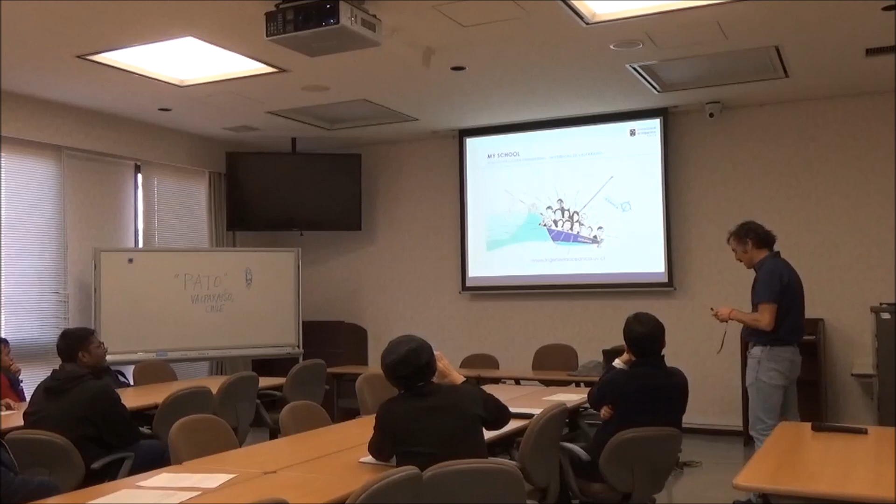I'm from the School of Ocean Engineering at Universidad de Valparaíso. It's a very strange name, but that's the name of the city. I'm basically a civil engineer, but I did some environmental engineering. My major in the PhD was environmental fluid mechanics, and I work with this professor, as Professor Lee told you just before. So I'm going to talk about this from that perspective, like civil engineering and hydraulics and all that stuff.

Why am I here? Basically because I'm very interested in what happens in Japan. So I took a leave of absence from the university from December till the beginning of March, and I came to the country of Yoshimi Goda and all these people. We had to deal with coastal engineering problems all the time, and Yoshimi Goda is kind of like, wow, yeah. So why not come to Japan and visit?

Also, I'm really interested in what Professor Lee does here in terms of tsunami interaction. That was one of the research topics I covered lately in the last couple of years. Now I'm shifting towards other things - in coastal engineering you do lots of things, it's not so specific. I'm working with Professor Kenji Satake at the University of Tokyo trying to learn something about inversion of earthquake sources with tsunami data.

It's just an excuse to come here and learn something about how research happens here in Japan.

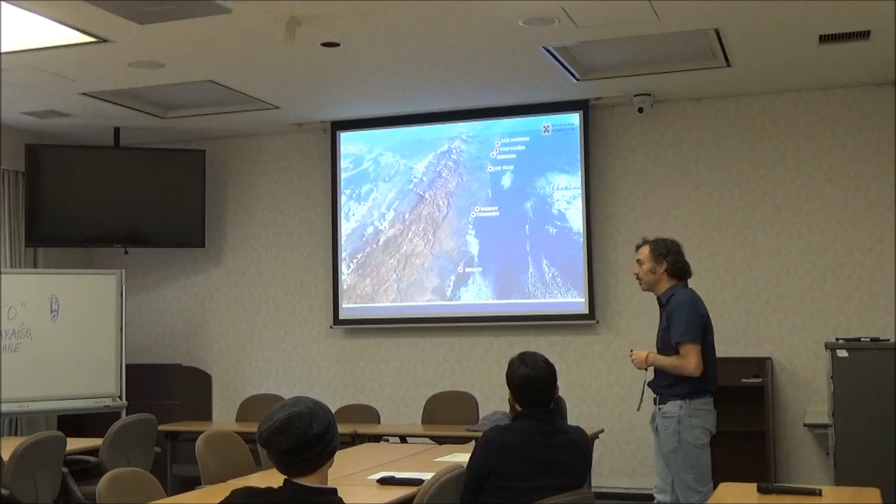And this is the kind of activities we have. We are a mining country - this is the export of iron. We also have salmon, almost all of our salmon is exported to Japan. This is in the south.

This is where the Andes sinks into the ocean. That looks like Mount Fuji. Yeah, we have lots of lower mountain Fujis there. And this is not a big one, they're much larger.

So this is my hometown, one of the second largest ports in Chile. My office is somewhere here, behind this. So imagine that you're studying tsunamis and earthquakes and all that stuff, and you're literally on top of the coast. So it's very interesting.

So if we talk about coastal engineering, just to give a general point of view, these are some of the variables that we need to take into account when we make a design - for example, a port, a coast, like a coastal road or whatever, or an artificial beach. You need to know some things, variables about the ocean, like sea level rise or not, waves, tsunamis, and all that stuff.

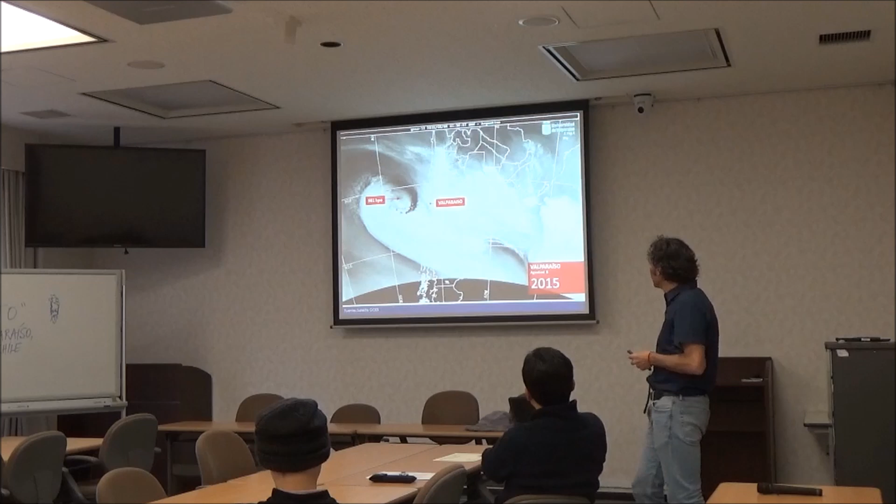I'm going to talk about a big storm. For us, it's not big if you compare it to storm surges in, let's say, the Gulf of Mexico. But I'm going to talk about one particular storm that we've been studying because it caused lots of damage in central Chile.

Very simple thing, but this becomes a little bit more complicated if we start digging into engineering. So waves in the context of storms can be separated into time and space, and there are different scales.

Swell generation and sea generation offshore can take days up to weeks in order to generate. But then you have coastal waters, the waves approaching the coast, which tend to be affected by refraction, shoaling, and all that stuff. Then you have nearshore waves where diffraction and reflection become important.

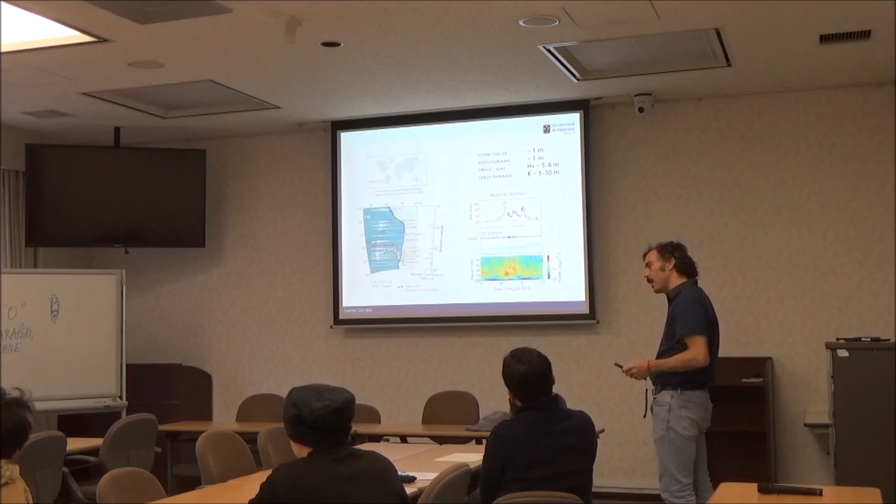So, for example, in Callao, which is something like 3,000 kilometers away from the source, this kind of perturbation was detected. So even though it's a locally generated phenomenon, it generates waves, tsunamis, and storm surges that radiate from the source and affect other places.

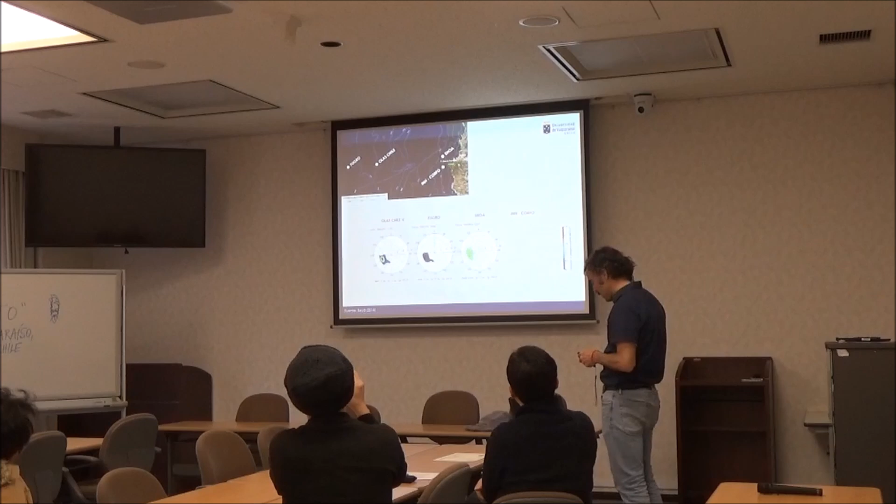Going a little bit more local, this is Valparaiso, the place where I live. What we can do is get information from wave hindcasts, forecasts, and also from buoys, in order to take that information as close as we can to analyze this particular case. Then we can use different grids to bring this information into more coastal areas.

And we can make analysis, for example, within the bay. These are many places within the bay - my office is here. This is basically the wave height, the period, and the tide level at different times. So we can estimate the overtopping, for example, in places like this.

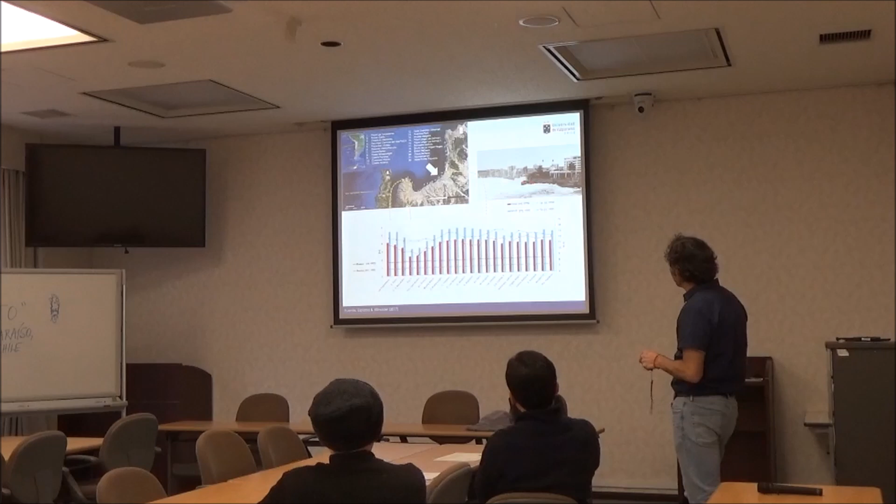So then you can go a little bit more in detail, and this is the analysis of this coastal defense. This is a very famous coastal defense because whenever there's a storm, journalists go there and start filming what happens because the waves go over and it's very dangerous.

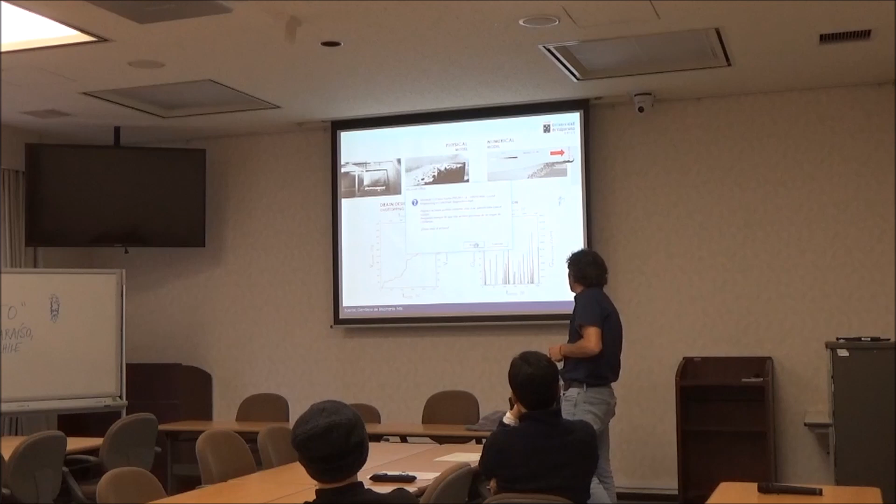And so this is a physical model that we carried out - the Chilean hydraulic lab carried it out - and we did the corresponding analysis with some sort of OpenFOAM type of model. So, for example, from this type of information, let me show you a video first. It will take some time.

So here's the submarine beach, and then you have the structure here. What we did here was build an artificial pond to capture all the water and estimate the volume, because with that volume you can design the drains of the coastal road to avoid flooding.

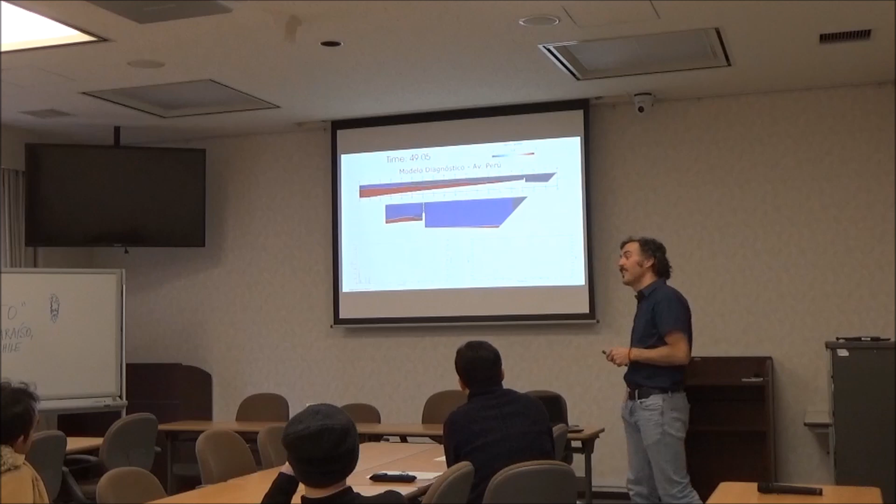And you can calculate, for example, instantaneous flooding or the accumulated volume over time. So in this particular case, we are calculating the flow crossing this area, and with that flow we can also calculate the velocities and see how safe it is, for example, for a person to be here, depending on the water depth and the speed.

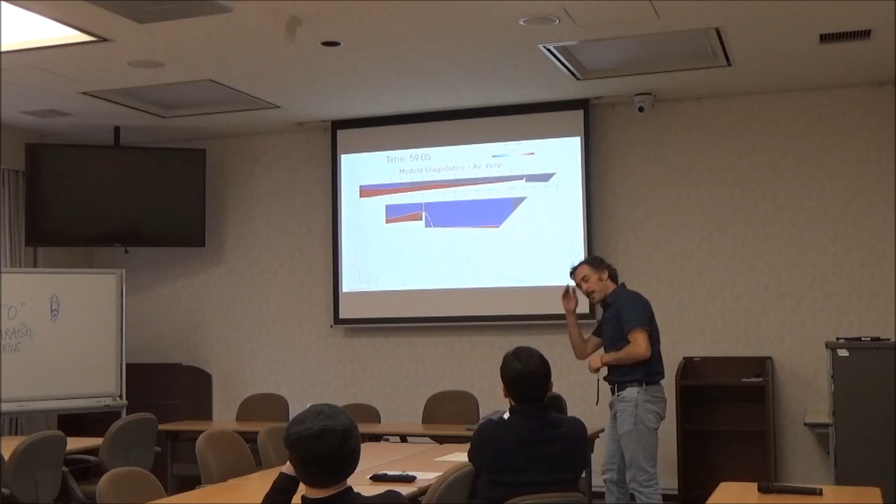Did you use OpenFOAM? It's OLAFOAM - an adaptation of OpenFOAM with some boundary conditions of waves, generated by Pablo Higuera from IH Cantabria, who's now working with Philip Liu in Singapore and the US. So they adapted IH foam or something? Yeah, they adapted OpenFOAM, and now it's called Ola, which in Spanish means wave. Ola foam, yeah.

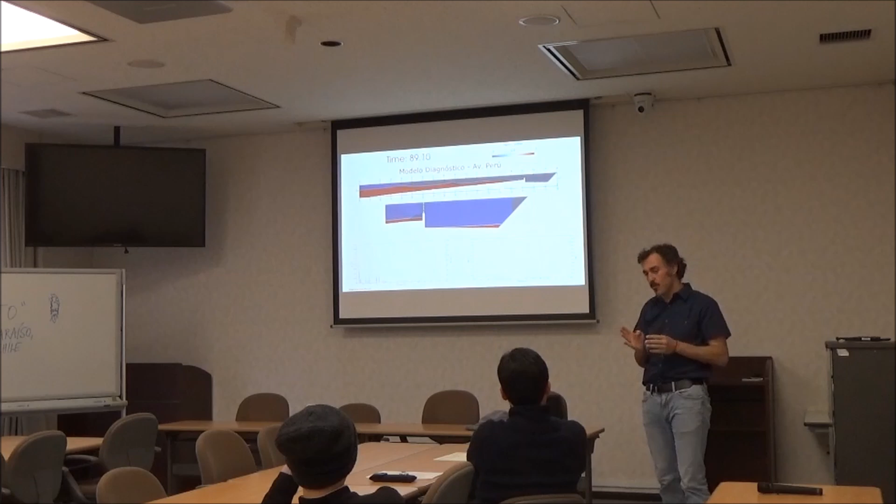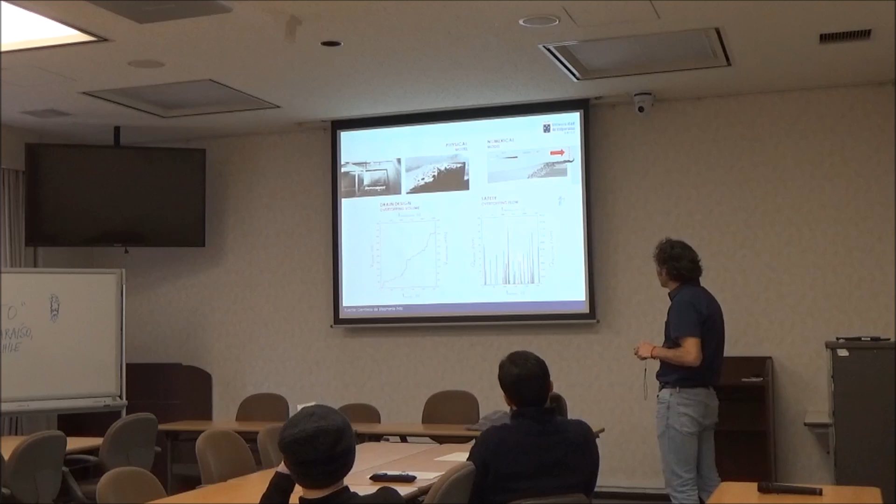Okay, so as I said, you can calculate the instantaneous flows at different times, and then the accumulated volume to calculate the drain design. And this one is for safety.

For example, this is something very preliminary that I haven't been able to review because this is an undergrad doing a very simple calculation. But for example, you can calculate with a very simple body force diagram what's the combination between water depth and speed that would make someone fall.

Yeah, very simple. I brought this one because I know Professor Taro Arikawa has done something with tsunamis here, but I haven't been able to find any paper in the literature actually calculating the flow and the body forces attacking a person or a car - kind of an empirical approach to understand what flow speed would move someone.

There are some studies, or even physical modeling studies going on at Kyoto University. Oh yeah, okay, so I have to go there. Yeah, because I know Professor Arikawa has done something, but I haven't found anything published.

Arikawa is in Chuo University. He was at PARI. Yes. But well, so now you give me an idea.

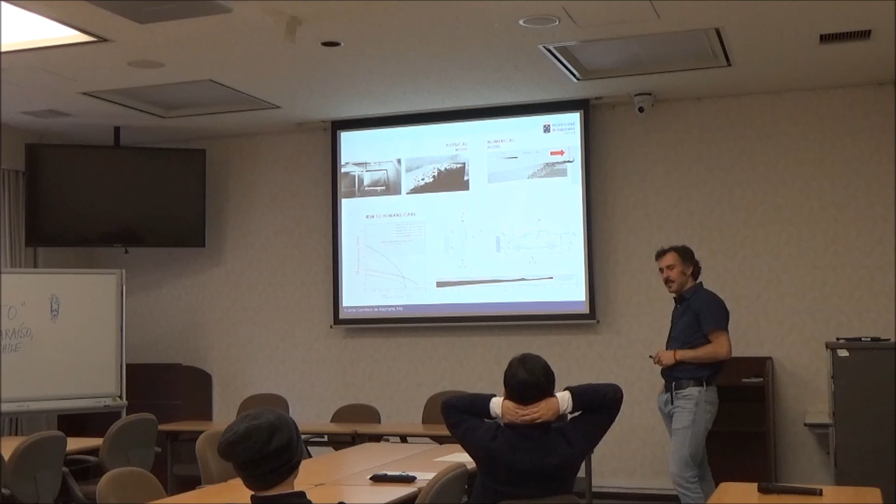Also, some hydraulic engineers in Kyoto University worked on this kind of body forces due to the tsunami, and even heavy rainfalls, so flooding situations. Yeah, very good.

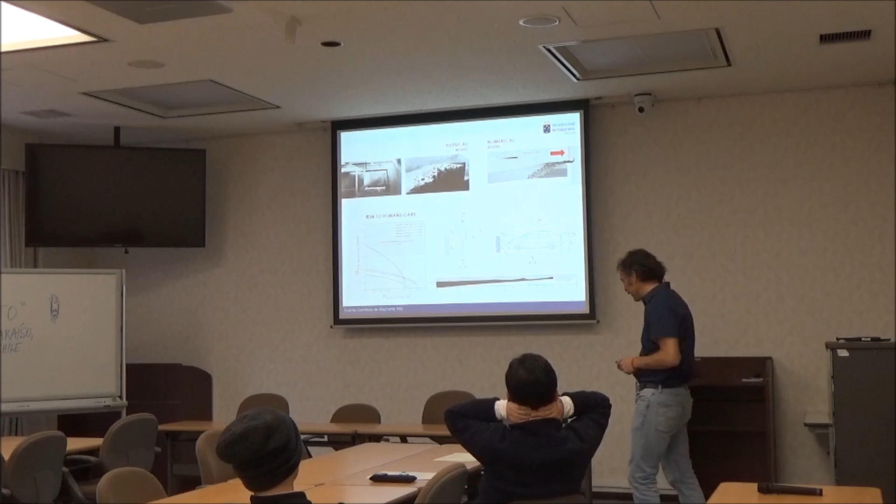Nice. Okay, so also what we have done is, for example, make monitoring of beaches to test some models. For example, XBeach, which is a standard, popular model to calculate the evolution of beaches because of the wave attack.

And in this particular case, what we did was calibrate the beach. This was the original profile at this place, and this was the final profile. Then we calibrated the model in order to tweak some numbers to make it work properly and reproduce the formation of these profiles after the storm.

Currently, we just built this flume in our school. We have no experience in physical models, no experience, so we just jumped into the pool without water. Okay, let's do it. And what we really want to do is basically, this is also a typo here, is to actually...

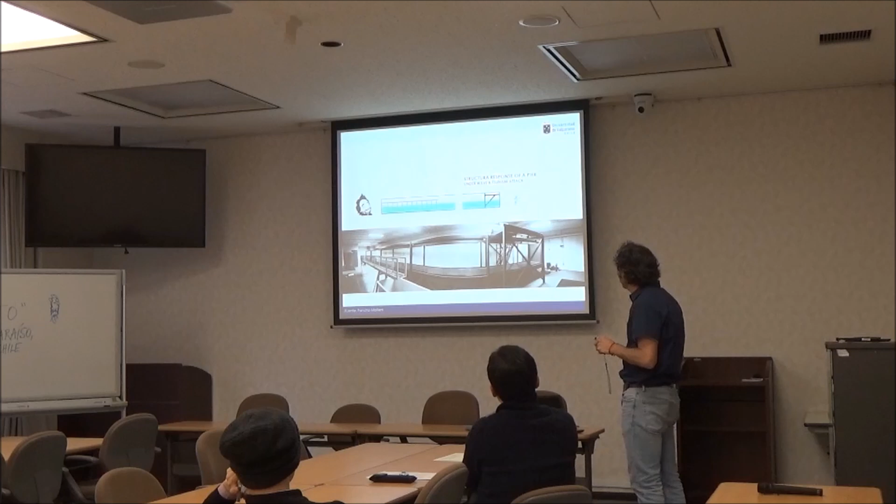Understand something about the structural response of piers under wave attack. So this pier, a little bit south of the place where we live, they were actually building the bridge, the pier, and it was damaged.

So yeah, this is the type of thing that we normally see in Chile. These type of piers are becoming popular because in some shelter areas in the world, there's little space in the shelter area, so some facilities are beginning to face the open oceans. So what we really want to understand is what's the structural response of this structure.

Okay, so let's see something about climate change. First, a couple of comments. This is again Valparaiso, and this is a breakwater which was built starting in 1912, over 20 years, and it was ended by 1930 something.

Yeah, and this picture is recent, so that means that this structure has been there for 100 years. This was the way it was built. In those years, Chile was very advanced because it was very connected with the rest of the world. All the ships would come through Cape Horn and stop in Valparaiso and then go to Asia or backward. But after the Panama Canal was built, all the ships started going near the equator.

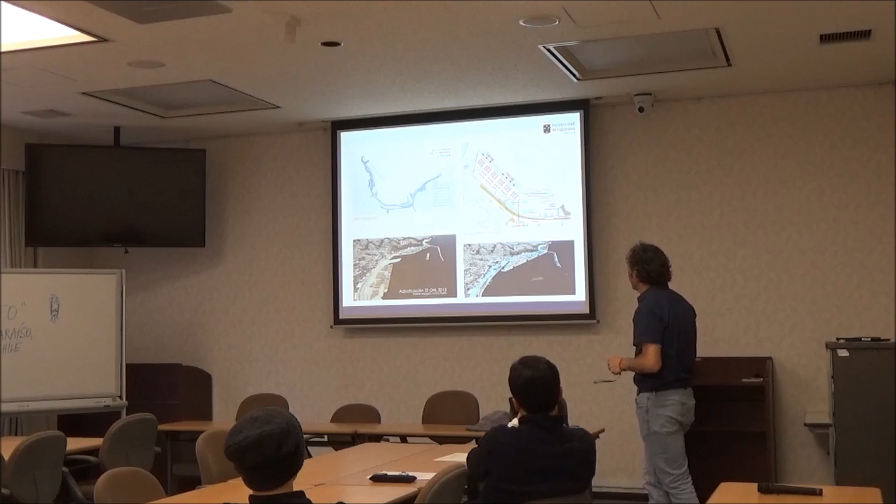So what is being built now? It's going to be probably till the 22nd century. So this is just schematics on how we deal with statistics. For example, let's say we are sitting today, 2017, and we're designing something. Probably it's going to be built 2020, 2025. These kinds of projects take between 4 and 10 years to finish, and so it's going to be way beyond

2100. Oh, how do you say that? It's the 22nd century. 22nd century. It's strange.

So then you may have statistical records, for example hindcasting wave data or actual records from wave buoys. There are some of them which go back to the beginning of the previous century. As long as you go way beyond that, uncertainty becomes even more relevant, because the information gathered 100 years ago was probably much worse in quality than what we have nowadays. And if we try to estimate what's going to happen in the future, we also have uncertainty.

So we have some data sets, for example from IPCC or similar groups, that can even predict what the wave climate will be in 2090. That's impressive, imagine that.

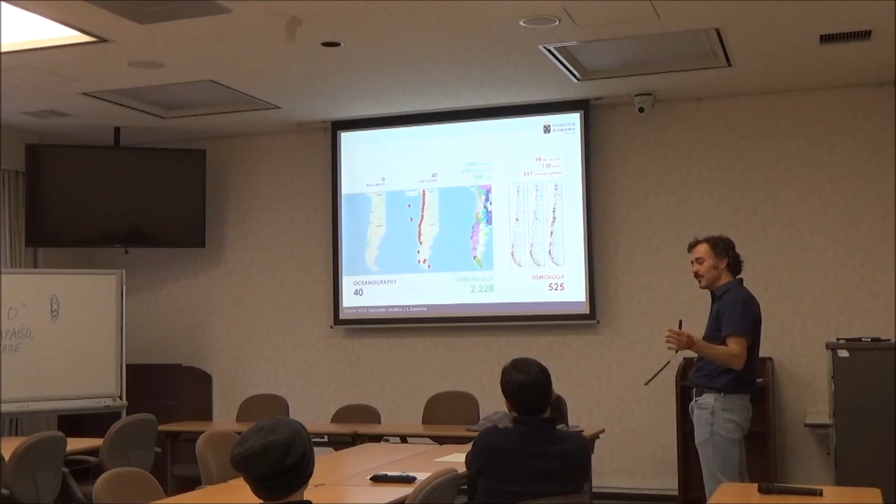And from the tide gauges, remember this is 4,500 kilometers long, so it's one tide gauge every 100 kilometers roughly. Almost half of them were installed after 2010, because of the earthquake. That means before 2010 we had roughly 20. And if you want to learn about climate change, you need long-term records. So we have really few long-term records. We don't really know what's going on.

So what we actually did to try to change some of these things: in terms of waves, we generated a wave atlas, by doing hindcasting. Nowadays we have 39 years of data where we can make a statistical analysis and all that stuff. We finished this last year, and now we're starting to analyze it. I'm going to show some of these results.

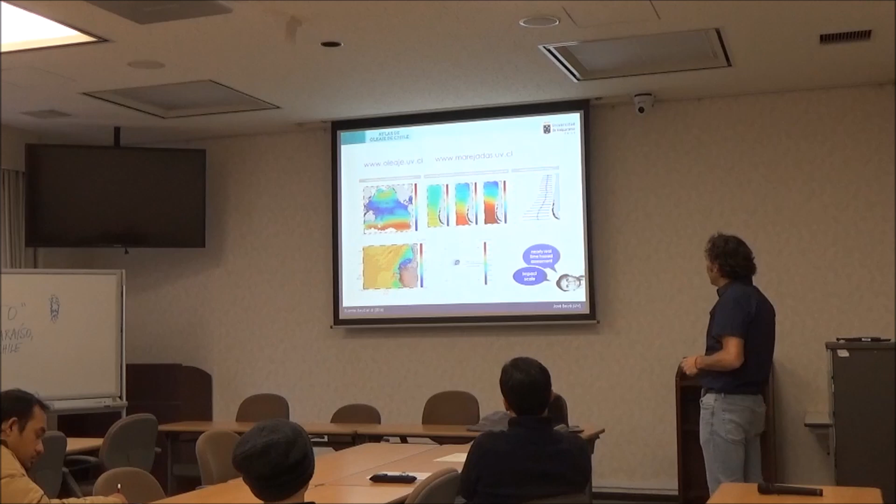So this is just an example of this type of analysis. This is data on the number of extreme events, meaning storms. By extreme events, we mean statistics of significant wave height, a statistical parameter characterizing the sea state. Whatever goes 2 standard deviations above the mean is an extreme storm. So we counted the extreme storms, very simply, between 1960 and the present.

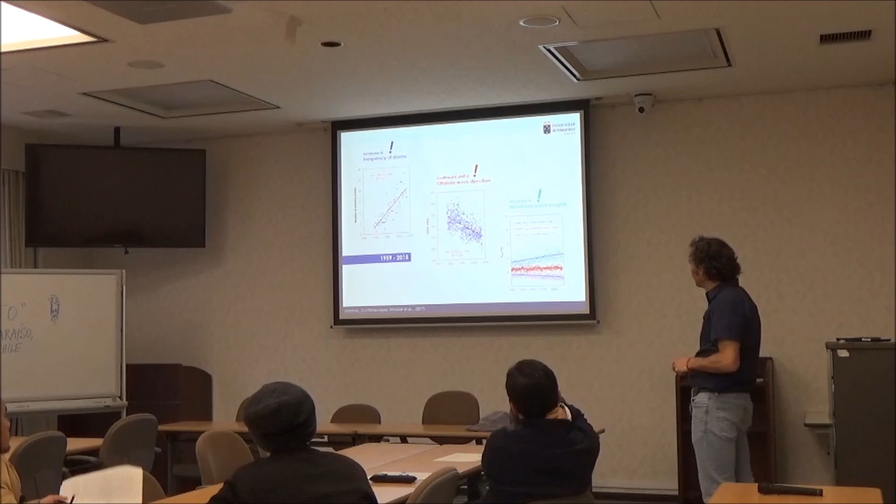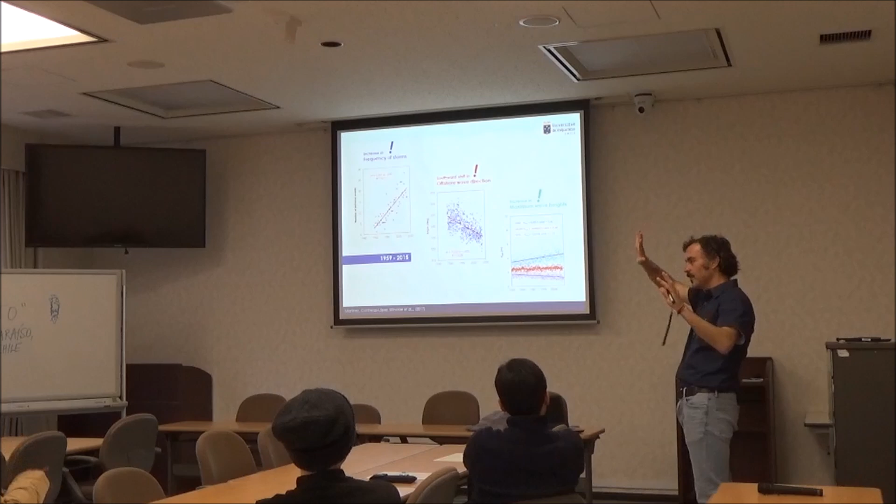And we've seen a shift in the offshore wave direction. Wave direction is changing because the whole climate system is moving in front of our continent. That means that if you have changes in wave direction, you're going to eventually have changes, for example shifts, rotations of the beaches, and that kind of stuff.

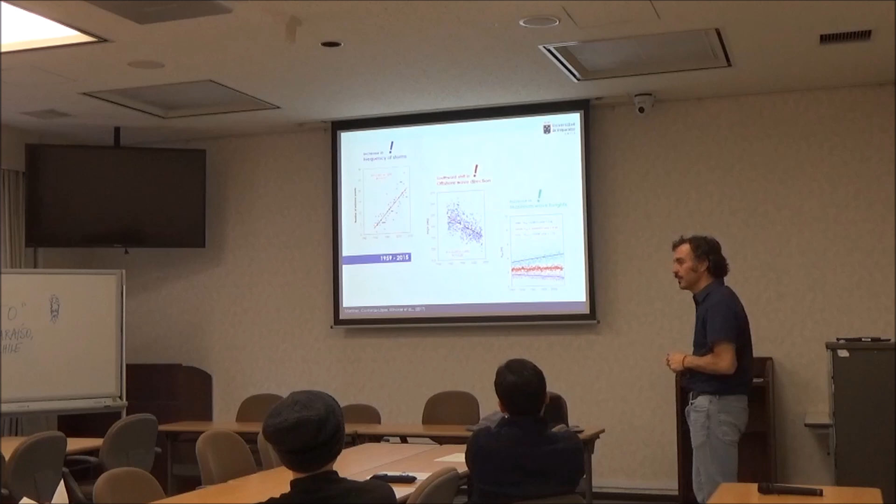So then what we did was extend this analysis to the whole country, since we have this idea all the time saying that we have almost all the wave climates we may find. Well, it's not quite that. And we detected that the slope of the significant wave height change is positive all through the country. So the energy of the waves has been larger between this period. And we've also observed a change in direction almost throughout the country. So what I just said before is evidence that this is happening almost in all the country.

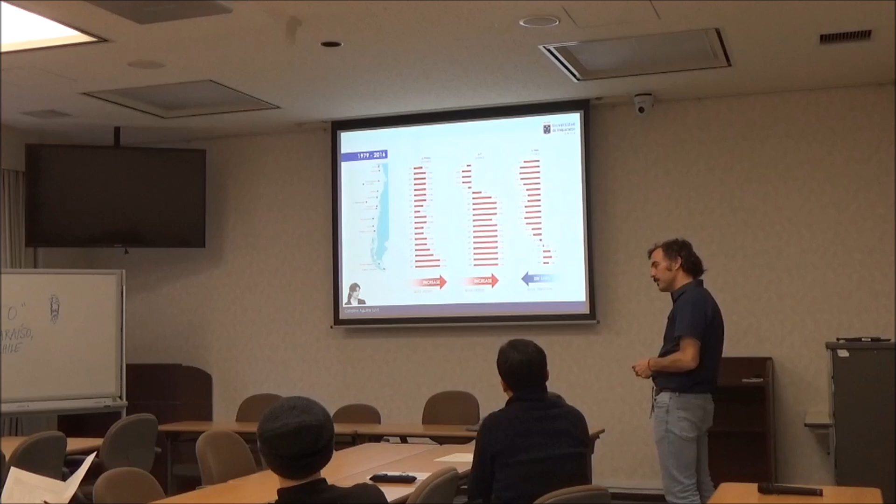So basically we have an increasing wave height, an increasing wave period, and a shift in direction. So what we're doing now is moving a little forward to try to estimate the return period of flooding in coastal areas. This is just an example of one of the beaches in the bay where we are. And we're trying to move forward to hazard maps.

This is just a small bit of work, and I think we should have a big battalion of people working on this - it's very hard to find people in Chile. But this is just an idea of what we should do. So we are trying to move forward to generate hazard maps of flooding because of storms. We already have done this with tsunamis, but the tsunami hazard mapping in Chile is very basic, deterministic with historical records, no probabilistic analysis whatsoever.

And we also have to move into inventory, basically to evaluate the vulnerability, we need to know what we have on the coast - that's the kind of things needed. And go to micro-zonation, defining very locally what are the responses of each individual part of the coast.

Another type of analysis we've done is to evaluate changes in the coastline. At the same bay, we have identified some stable beaches, some that are tilting, probably because of changes in wave direction, and some that are being eroded. We don't really know if this erosion is due to changes in wave conditions or other variables that may define erosion, for example urban expansion. The city has expanded, and the basin that used to be green is now under concrete, which changes all the dynamics. That's the kind of thing we're doing.

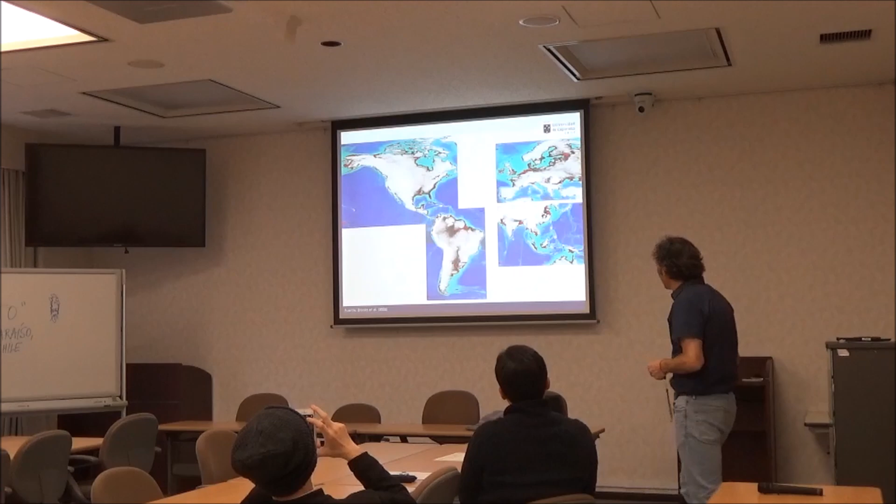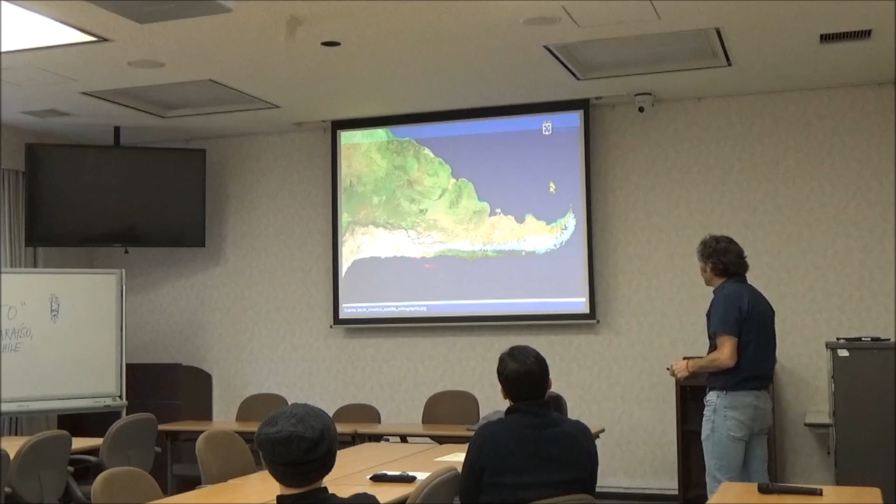So, as I said, in Chile we have this almost permanent uplift mainly where the Andes sinks into the Pacific. Almost no people live here because it's too cold and very difficult to get to, so here we probably won't have too many problems in terms of flooding.

We believe, and I haven't gone through all the geodetic studies being carried out, there are some being done now, but we believe these signals are very affected by the seismic cycle - the co-seismic change during the earthquake, the inter-seismic cycle between earthquakes, and the post-seismic cycle, which is the rebound after the earthquake. All these things may be affecting the position of the tide gauges, and then affecting the record. There's also the El Niño Southern Oscillation, which is something we haven't done and is interesting.

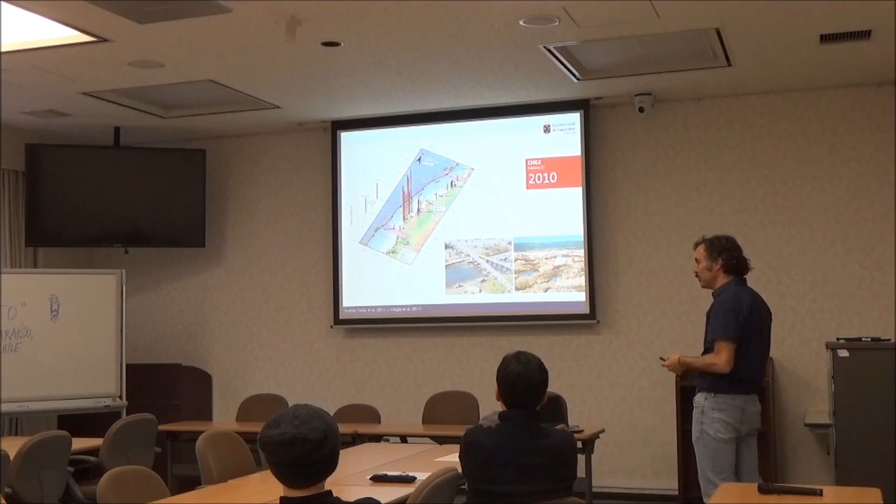So, for example, this is the uplift of 3 meters generated by the 2010 earthquake, magnitude 8.8. According to average values worldwide, 3 meters is like 1,000 years of climate change, but you have it in a couple of minutes. So the earthquake signal is super important, and you may see, for example, fishing ports, but they are not useful anymore because of this effect.

Japan is, I guess, the third economy worldwide, and Chile is like the 40th or somewhere. So you're much more developed, and you can see that in research. For example, having like 15 people working on a very specific issue is very difficult to find in Chile. So we have a lot of things to learn from Japan.

After 2010, there was an agreement between the Japanese government and the Chilean government. It was a 5-year project in which Japanese researchers went to Chile and the Chileans came to Japan. So we've learned a lot about tsunamis and earthquakes from you.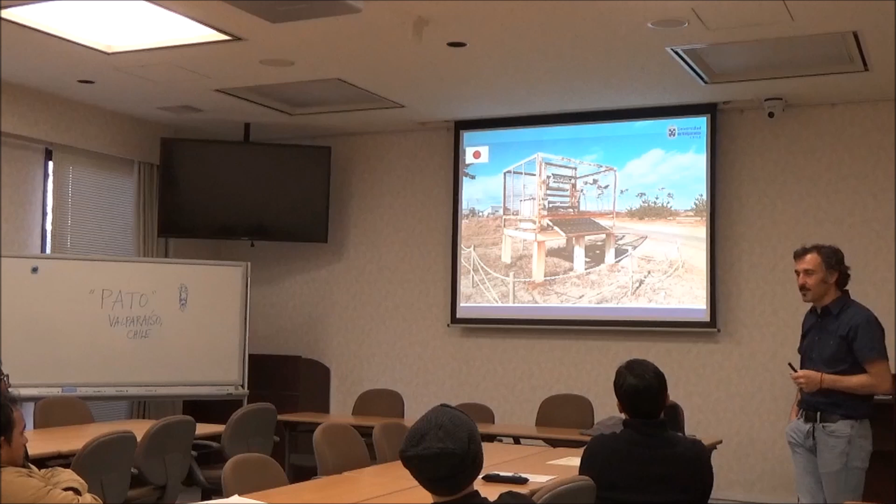And I think that this is a flow rate measurement, I don't know how you call it. This is a device that rotates with the flow—well, it should be with the flow, so the wind doesn't rotate it. It's measuring some things like hydrometers, something like that. It's located in a base, and I just guessed that when future tsunamis come, at least with the rotation of this, you're going to be able to calculate the speed. Someday, I found it like, wow, this is so simple—why didn't we think of this before?

So yeah, that was what I wanted to say. Thank you. Questions?